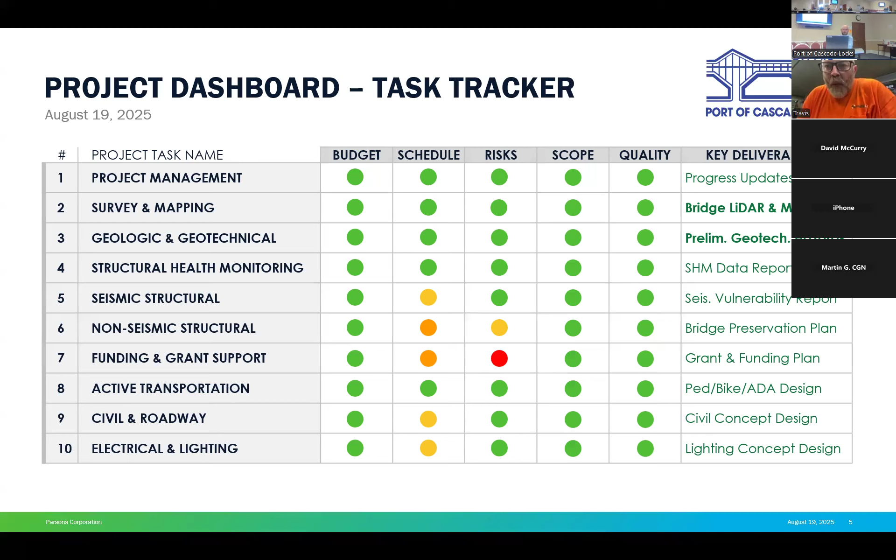So the civil, active transportation, electrical and lighting work is all just dependent on the survey and stuff, and it's pretty minor work relative to the structural work.

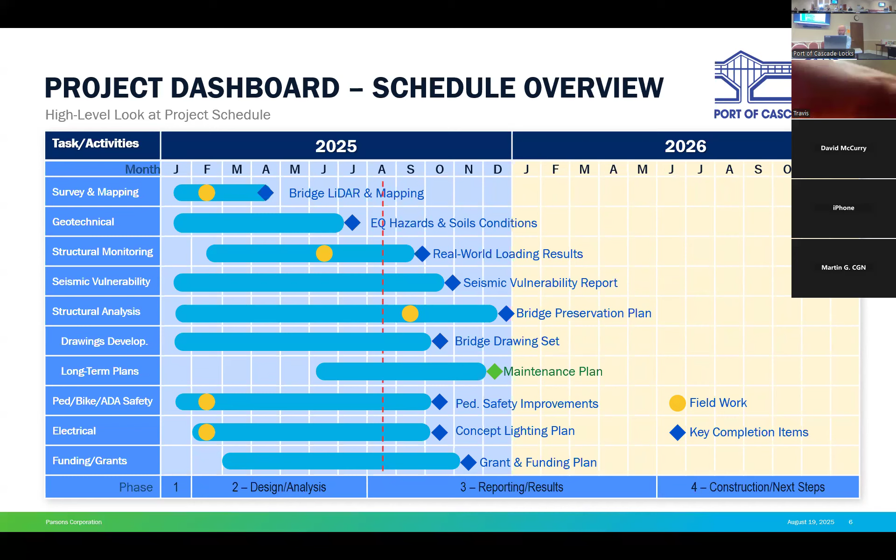I was going to mention the schedule - you can see at the bottom, phase 1, 2, 3. Albert's brought this up in the past. That's kind of the big phases of the work we're doing. We're really transitioning now into the reporting and the results. So we've got a lot of good information to share, and that's where we're going to start to focus - this is what we know, this is what we found, and then we'll really start to talk about decisions based on that information. So this graph just gives you a high level of where we're at. We've passed a lot of good milestones, actually. So we'll just jump into the more interesting things.

So just as a reminder, what we did already this summer is go out and do these geotechnical borings. We drilled down like 200 feet on both sides of the river. Got excellent information, and I'll share why.

We also took the soil out of those 200-foot tall columns, took it to the lab, and tested that information. We also put instruments in the hole to measure different properties of the soil, including piezometers, which measure groundwater elevation, so we know what the groundwater is, and also what we call shear wave velocity testing, which measures the strength of the soil for seismic dispersion.

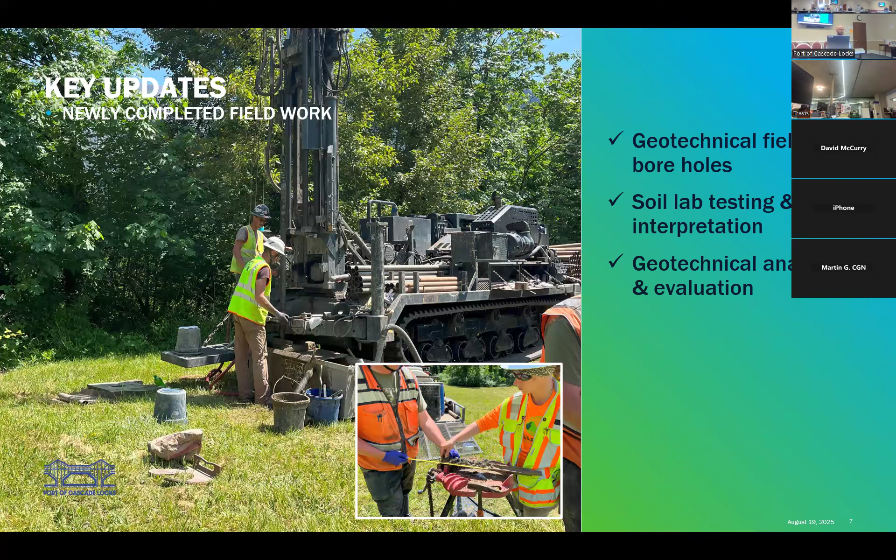So that's all done. The other thing we did, late at night, was close the bridge intermittently for 20 minutes and took a truck of known weight after we had installed the structural health monitoring system, and we ran it in very specific locations at very specific speeds. We came up with this plan and used this truck, loaded it, ran back and forth a couple times in different directions and locations. We also stopped it and let it sit and collect the data, which allowed us to calibrate the system we put out there.

We know based on the data where the vehicle was positioned, which lane, and how much the axles weigh. So we calibrated the system pretty precisely. Now we'll be able to use that information to predict the future life of the bridge—what's remaining.

Everything went really well, no safety incidents on any of the field work we did, and we collected really good information. Last week, ODOT ahead of schedule did their biennial bridge inspection, required by law. They went out, climbed on the bridge, and got it done in a week, despite some wind and rain.

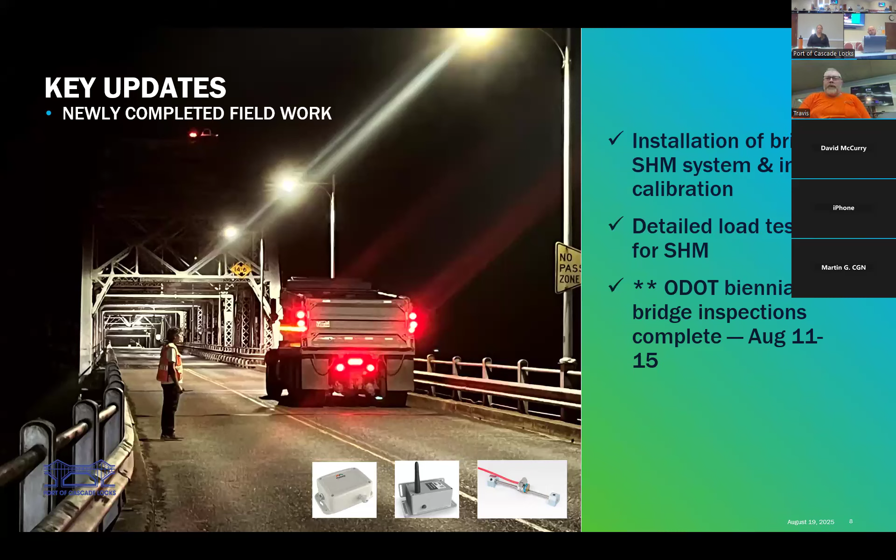So a couple other quick updates. We are doing the underwater bathymetry, which maps the river bottom, to get an idea around the piers if there are any big scour holes. If you stand out there and look at the Bridge of the Gods, you'll notice big swirling water downstream of the piers—that generates scour, which can create a hole behind the pier. That's very common; bridges are designed for it. We just want to know if there's something there, and the mapping will tell us. If there's a ship down there, we'll see it, but we don't expect very many ships—mostly just rock and debris around the piers.

We're also going to do a side scan image of the pier—I've been talking about this for a while, and it happens Thursday this week. There'll be somebody on a small boat. We're also doing a hands-on inspection on September 29th. In addition to what ODOT did, which was a routine inspection, we're going to specific areas and collecting dimensions of places we don't have information on, to make sure we've covered those things.

A little more interesting things coming up. Again, we sadly never got plans, and we still don't know who truly designed the bridge. We know who built it, which is great, but we don't know who designed it, which is okay—we've been able to recreate the drawings.

We already talked about funding. Everything went really well in terms of success—there have been no safety issues, and we've been able to get permits on time. The structural health monitoring system is up and running, everything's working. There was one sensor that had to be replaced within a week, but that got fixed—just a faulty sensor.

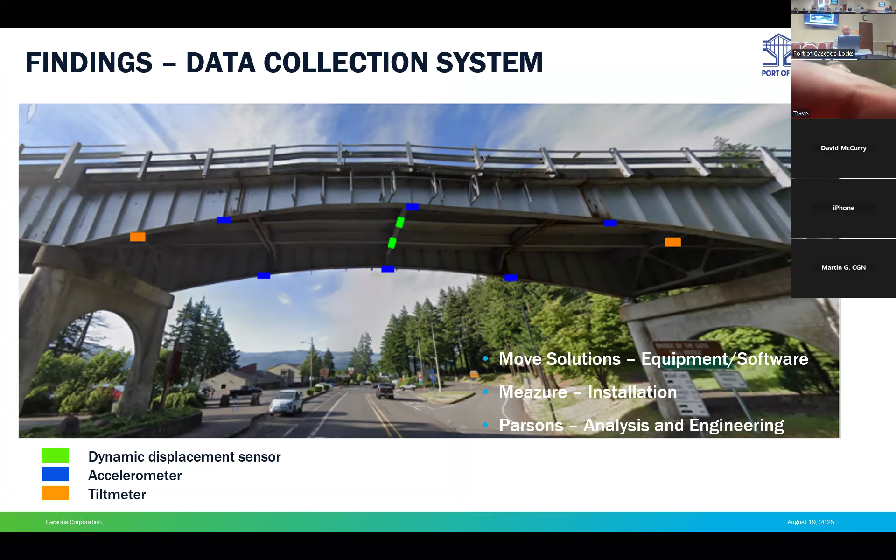As a refresher on the system in place now, I'll show you two images. The green, blue, and orange in this photo are just movement meters—that's the basic way to think about it, they measure movement. In the next screen, the red sensors measure strain, which is how we calculate stress, and then we take the stress to determine lifespan and any concerns associated with it. This is where the strain gauges are on the bridge, generally.

So obviously where these are currently at, that distance between those two columns that are supporting it are significantly closer together than they are whenever you're over the water. So what is the calculation of this in relation to that over the water?

So we're collecting the data here, knowing that it's the same vehicles going over the bridge. It's more difficult to collect the data on the main span. It would have been more difficult to install the system, which would have been bigger and more expensive. So this is a really nice little gateway onto the bridge.

Where we can collect the data. Also, because these spans are simpler than the truss, it's easier to calibrate, it's easier to do our digital twin structural model and compare that to what we see in the field, and then extrapolate to the truss.

I guess that's my question - whenever you collect the data here specifically for this particular section, how does that translate to the sections that are actually over the water, whenever the columns underneath them are further apart and you have completely different materials? Because it's the metal grates on that side, but this side is still gonna be the concrete. So how does that connect between the two?

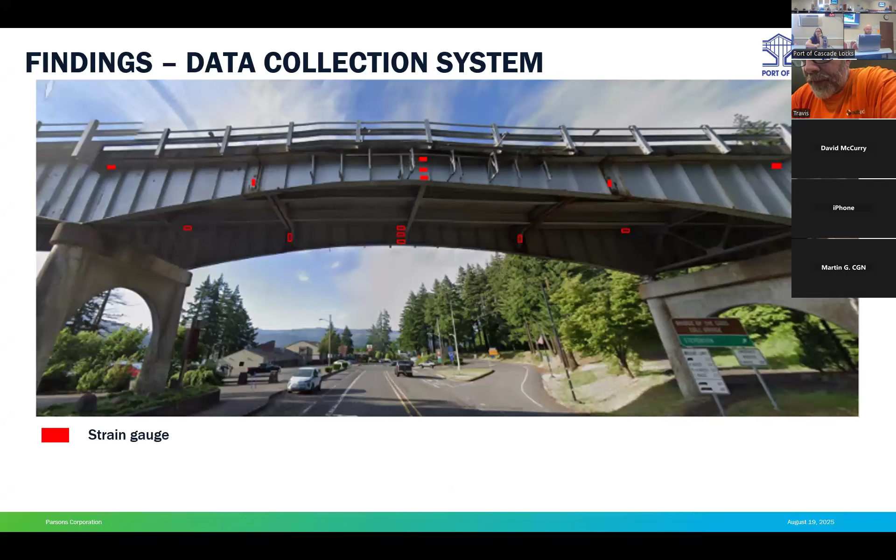I was just thinking the traffic is going to be different at different times of year too. It's a great segue to the next thing, which is what are we seeing, right?

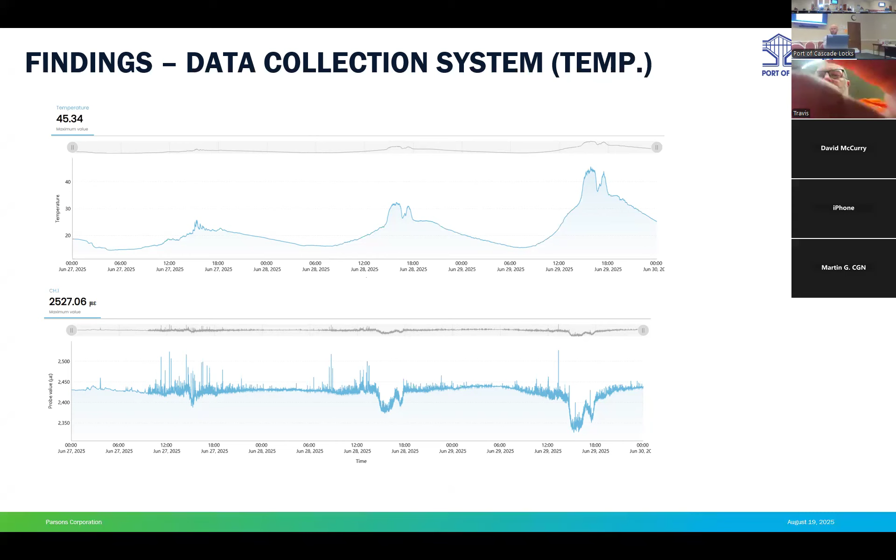I wouldn't worry too much about exactly what the temperature is, it's probably in Celsius, but the bottom one is the strain we're seeing, just one of the strain gauges. As the sun rises, the bridge sees heat, starts to expand and sees a little bit of stress and strain. These numbers aren't big, but we can see what's happening to the bridge—it's sort of breathing in the sun. Then as it cools down at night, it settles. The reason that matters is because we then take that noise out, since that's just happening naturally.

You get a similar kind of stress during freezing—the opposite, it shrinks. Interestingly, there was a run on the bridge while the system was up and running, so we were able to collect what happens on the bridge during a bridge run race.

What's interesting about this graph is when a truck goes by—I'll show you the next graph—I circled it, because when a heavy weight goes by, like an axle, you see a spike, bang, the stress and strain happens instantaneously. Axle goes by, bang, hits it, the bridge responds. But when you have a whole crowd of people hanging out on the bridge, close together, doing a little run, it looks different. These aren't alarming numbers, we're just observing the real natural behavior of what happens on the bridge.

What we are going to be able to do is translate the numbers to cycles of stress, and therefore estimate the lifespan of the bridge. So I found that quite fascinating.

Jeremiah, did you have something? I'm good. Okay, yeah, so again, this is just one of the gauges, there's a bunch of gauges.

But I think the run started kind of close to the left line, the red line, and then it was kind of busy—lots of people were stacked up on the bridge.

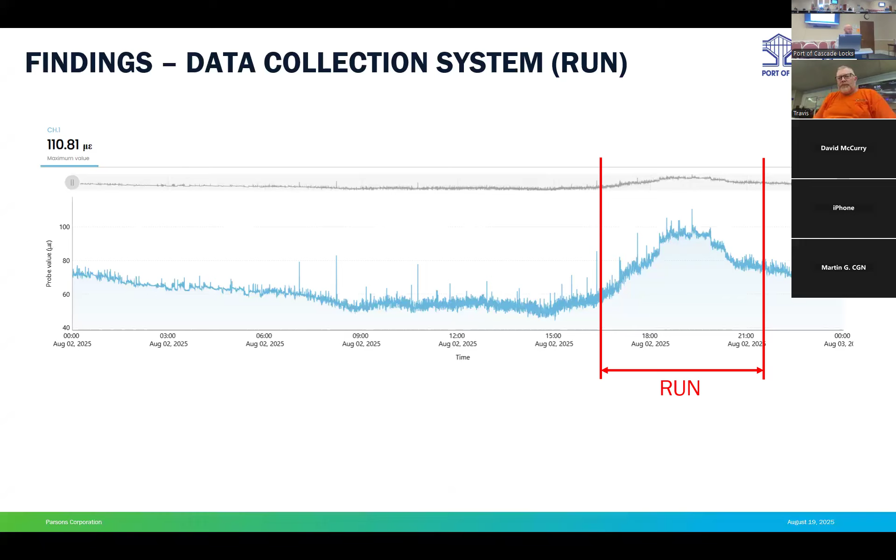Was it you guys? No, no, the load testing happened at a different time. Just to put a pin in that - the load testing went perfectly smoothly. It gave us all the results we needed and told us everything we expected in terms of the behavior and stuff like that.

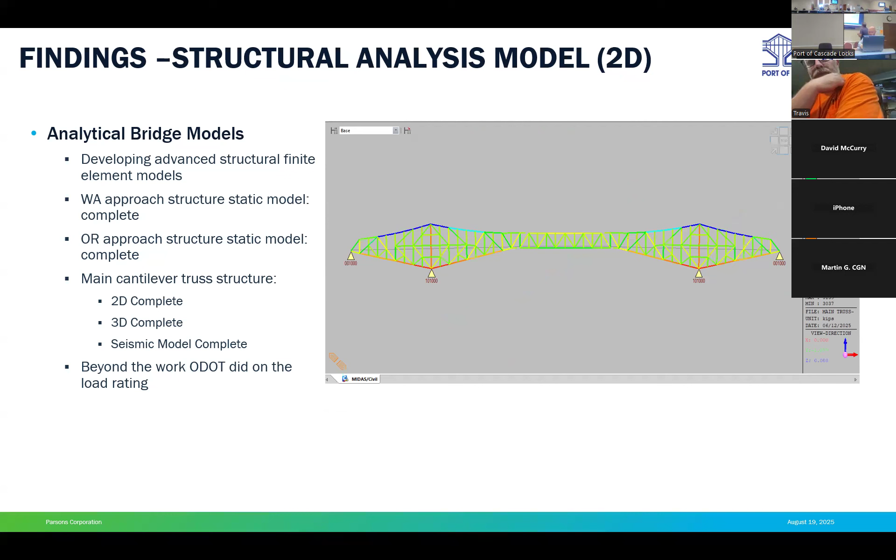I guess this side is probably where you guys have the sensors, right? Yeah. So my question is, if you have the sensors here, it's not actually this particular part of the bridge, right? So if we have the sensors here, but it's a completely different material, and those columns are actually closer together, what is that mathematical relation between what you're seeing here versus what's actually happening up here?

So maybe what I'll say is, on the Oregon spans where the strain gauges are, it's a little bit less about the instantaneous stress happening right then, and more about how often the stress is happening. So we take that data from those Oregon spans about how often the stress is happening.

And we know that those same trucks are going all the way across the bridge, so we can calculate anywhere with this model. We don't need the gauges. We can calculate any kind of movement, stress, strain on this model, just like we did on the Oregon spans. We have a model of the Oregon spans, it's not shown here, and we can calculate those same things, totally independent.

And then when we look at the data, we just know what's actually happening on a regular basis, not what we calculate to be safe load limits, right? Yes. I guess my question is still, what is the correlation between the two? Because they're different materials, different stresses.

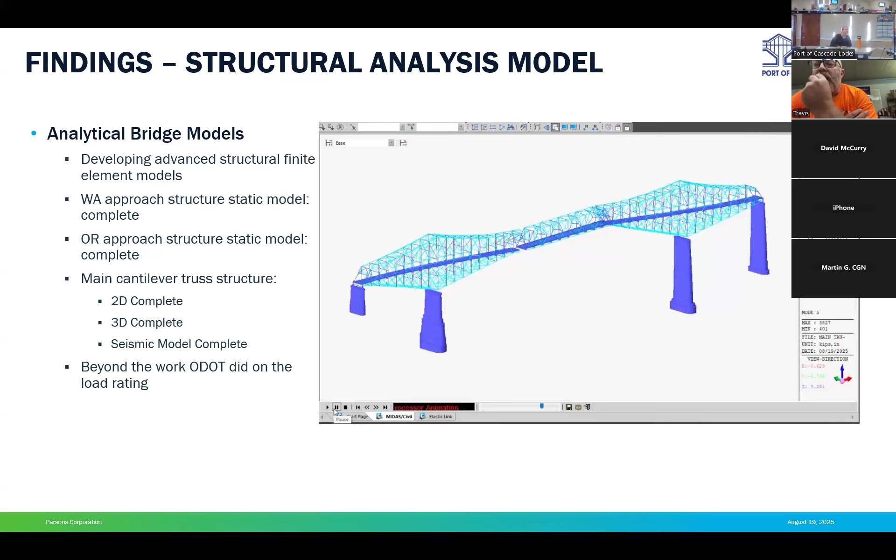Can the model also run a collision, a strike against the bridge—pick a pier, something hits it? Yes, absolutely. That's happening.

Just put a pin in that for a second—there's more interesting stuff. So I mentioned that we did those deep borings. What did we find? This is small, I'll get you guys a printout.

All you really need to know is there are two images of the bridge here. This is like looking at the bridge if you're on the stern wheeler, sliced through and looking at it from the dam side. There's a gray background—that was the original bridge location—and the green/cyan bridge is the raised location. The colors show the land formations, the geology below the bridge, and the purple is Ohanapecosh, which is really old bedrock.

I was telling Jeremiah before—just think about the fact that the Cascade Mountains have been rising up due to plate tectonics, but the Columbia River's been here longer, and it's been slowly carving down into the mountains as they rise up. That's why it's so beautiful here in Cascade Locks, right? You have this weird combination of river and mountains.

But anyway, the good news is all that purple stuff is good foundation material—good, solid, firm material. It's not the bottom of a landslide. On the left side, the Washington side, that yellow color is the Bonneville landslide deposit as it's spread across the river. We know how deep it is, and it's not as deep as you might imagine.

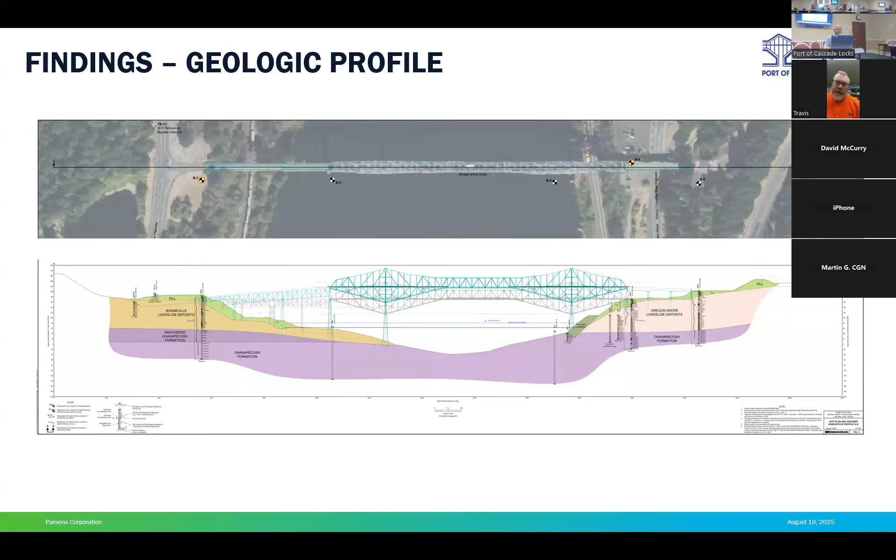Bedrock's way down, and here we don't have that. So that's great news for the possibility of retrofitting. On the right side, there are actually really old historic deposits that are landslides as well that have come down from the mountains, sometimes millions of years, sometimes thousands of years. The Bridge of the Gods landslide on the Washington side is thought to have come down in 1476. There's a closer, maybe better view, just the current modern day bridge, and at some point I'll do a larger printout so you can take a closer look.

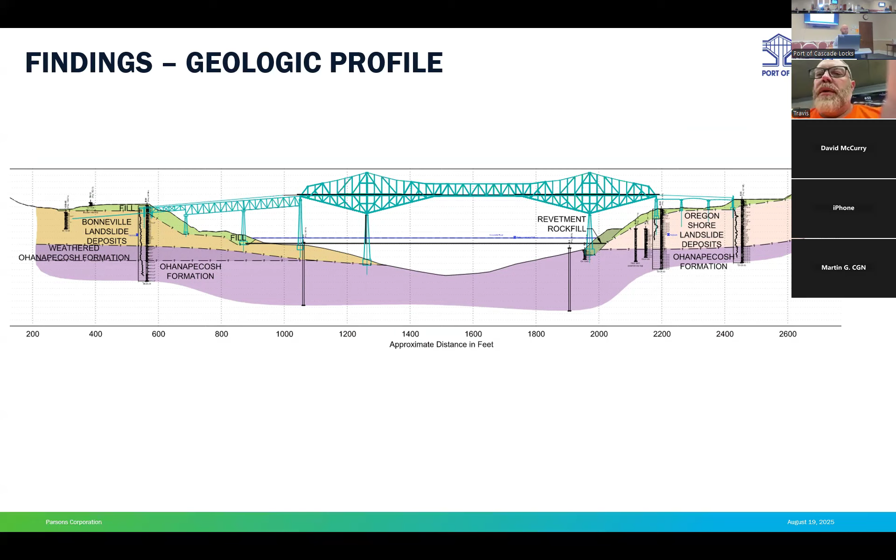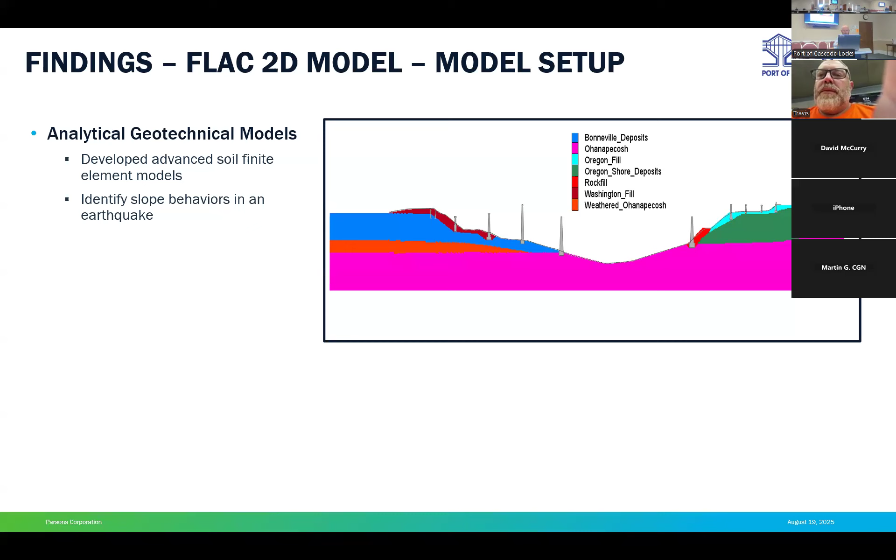Do we know that the earth is currently sort of loose? Like, why would it move? It's because this is the subduction zone, lots of energy, lots of shaking. That's why the Bonneville landslide is there, tons of energy coming up from the earth. So these kinds of slope failures you're going to see throughout the gorge in an earthquake that big. This would be very, very common and not that big of a deal.

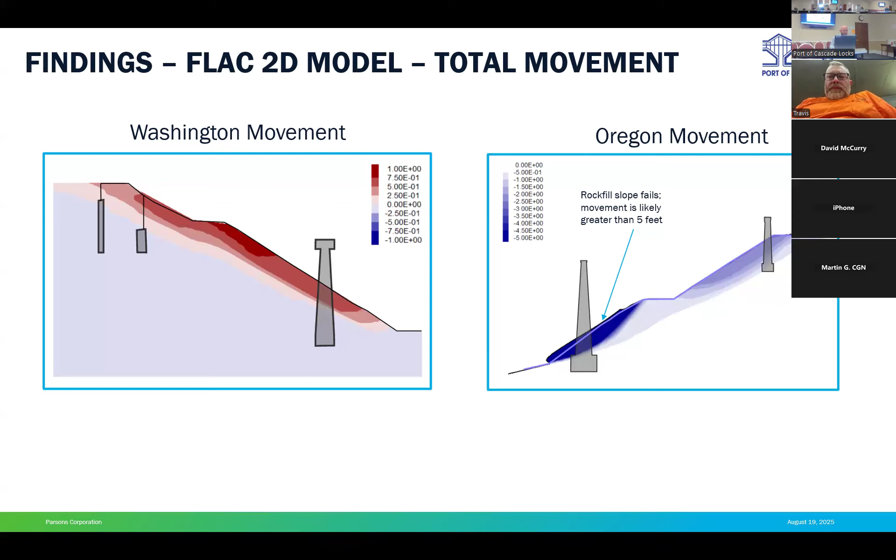So, great news. These are just the next steps. Again, we're going to continue to do analysis, document a lot of the detailed vulnerabilities. We're also putting together a preservation and maintenance plan, finalizing the drawings for the bridge, concept plans for retrofit, as well as for lighting.

Sorry, that was a lot, but it's great. We've made a lot of progress, it's all fascinating. Thank you, any other questions? That is good to know, better than we thought. Yeah, the bottom line is better than we thought. Travis, anything from you? No, I'm good. All right, he's doing good. Thanks, David, appreciate it.